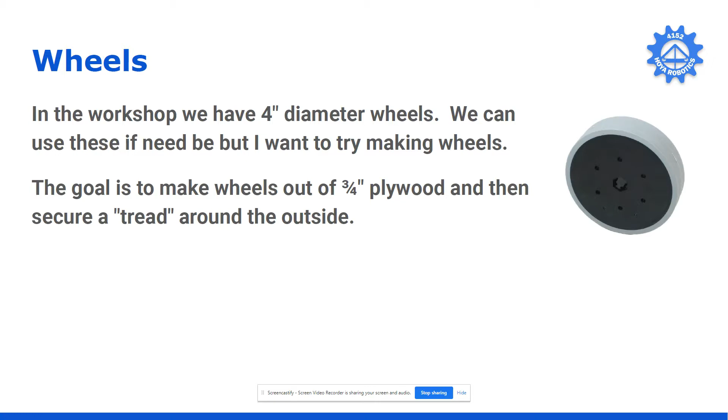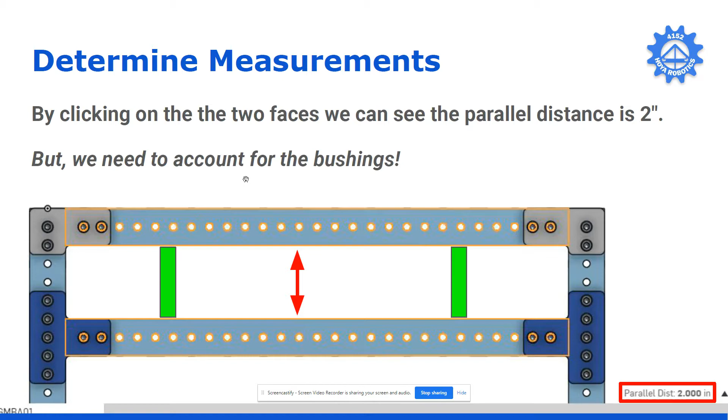So in onShape, it's really important: if you click on different parts, you can get distances between them. So I angled my view so that I could click on the inside of the square tubing and the inside of that, and I can see that the distance between them is 2 inches. And the key thing is that it's actually going to be a little bit less because I need to keep in mind the bushings. So when we have a shaft that spins, we need it to be able to spin smoothly. So you have a couple of options.

The option that we like to use the most are bearings, and this is an example of a bearing. You have little ball bearings inside of it and they spin. So this works really, really well. The problem is our 1-inch square tubing is just a little bit too small. So this year we were doing an intake that was going to be out of 1-inch square tubing because of the size we needed. So we tried using these types of bushings and they worked really well.

There's a little bit more friction than a bearing because it's solid brass, whereas the bearing has the wheels that allow it to spin. But it seemed to work really well, so we're going to try using that for our little mini robot.

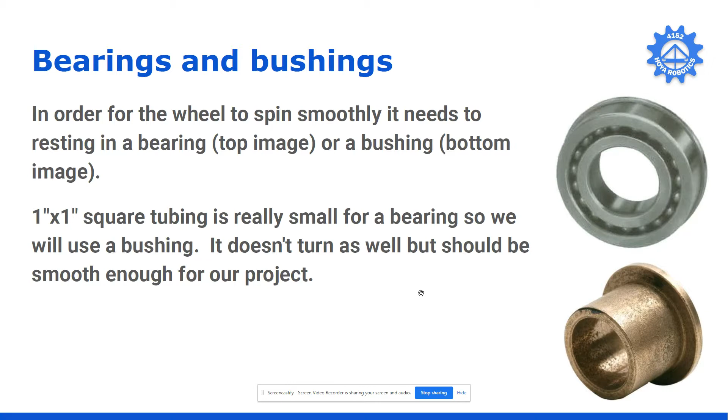Fastenal is a company that we like to get a lot of these supplies from, and so it's really important to go there, and I made note of what the part number is. But what's important is this flange; we need to make sure that we figure out the thickness. So the thickness of that is 0.063 inches. And that's going to stick out of the square tubing. So when we're making our shaft, we need to keep that in mind.

Now we tend to use Hex Shaft for shafts. The reason is that if you use a round shaft, you've got to figure out how to secure that wheel. And with the Hex Shaft, it works really well because the wheel slides onto it, and the hexagon shape means that when the shaft turns, the wheel will turn as well. So that's why we tend to use Hex Shaft as much as possible. So we're ready to get started. I'm going to switch over to onShape now, and we're going to get going.

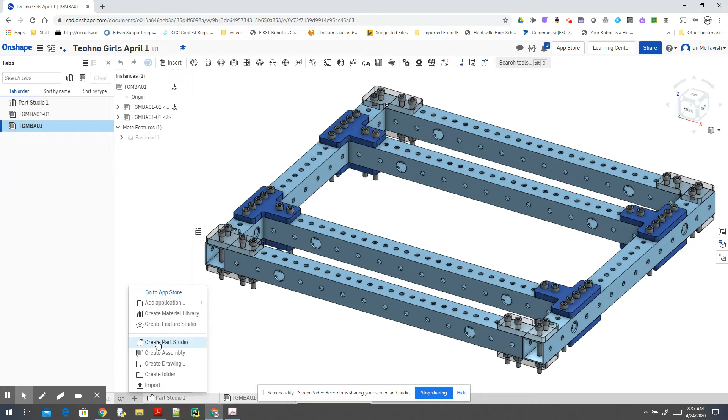So the first thing is that we're going to create a new part studio. We're going to click the plus sign, and we're going to click Create Part Studio. And we're going to rename it. So I'm going to rename this Part Studio Axle. You notice in the Tab Manager, I'm right-clicking and renaming. And if you don't see the Tab Manager, down at the bottom is the little magnifying glass, and that is how you can open up the Tab Manager. So this is going to be the axle that I'm going to be working on.

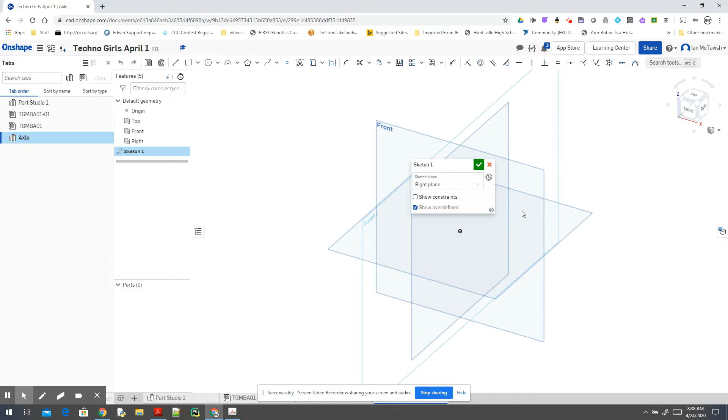And so I'm going to do that, and I'm going to select a plane. I don't want the top plane because then I have to turn my wheel up. So I'm going to use the right, because if I set everything up correctly, then it would be there. So clicking the right plane and then clicking sketch will bring me into the sketch. And just a reminder from an earlier tutorial, when you have this little sketch box up, you can see the toolbar. So if you're missing that, then you're not in the sketch. Clicking the green will save your sketch. Clicking the red is not good because it will delete it.

It will delete anything you've done since you started that particular time. So I'm going to press N on my keyboard. That normalizes my view so that I can easily see everything. And in Onshape, we've been doing rectangles and circles, but there's other tools. So we're going to use the polygon tool.

So the polygon tool is pretty neat. I can click on the center, and you can see I'm holding my mouse over the origin. It goes orange, and the little coincident icon pops up showing that when I click, this will lock the center in place to that. And I can move my mouse, so I'm going to click a second time.

Now, this second time, after I click, the little number 6 comes up. So if I move my mouse, this will change how many sides my shape has. So I want to make sure that I get it so that it's on 6 and then click a third time. So take your time with these things. It's really easy to make a mistake, so just go slow. If you run into problems, undo and try it again.

So I'm going to click the polygon tool to turn it off, and I should have a 6-sided hexagon on my screen. Now, there are constraints over here, and again, depending on your screen resolution, you might not see all of them in a line. You might see one of them with a little drop down. So you want to look for these two icons. If you don't see all of them, look for search tools, and then right beside it on the left with the drop down should be it.

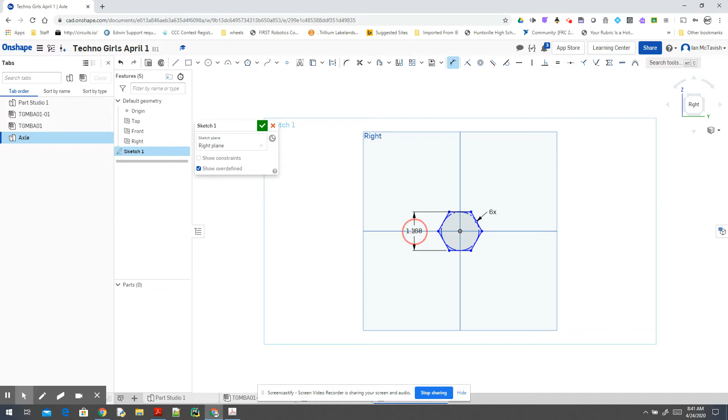So I'm going to click a third time, and now I can type in, and I'm going to type 0.5 IN for inches. So that will resize my polygon, and you'll notice my polygon is completely black now. That means it's fully constrained. It knows exactly where it's positioned. It knows that these lines are horizontal and that this is 0.5 inches away from the other line.

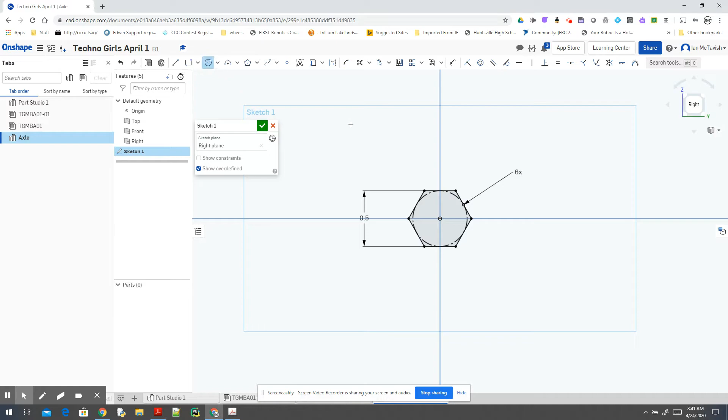The next thing that I'm going to do is I'm going to use my circle tool, and I'm going to click in the center, and again I'm looking for the orange to make sure that everything is locked in place. So I'm going to click once, I'm going to move my mouse, I'm going to click a second time, and I'm going to type 3/8. And 3/8 is the equivalent of, and notice I'm turning off my circle tool, 0.375 inches. So I have a 3/8 inch shaft, and I've got a 1/2 inch hexagon.

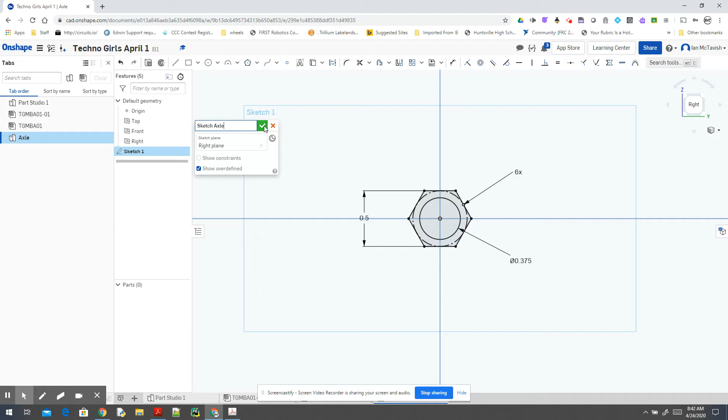So I'm just going to save my sketch. You'll notice that I'm naming it. Get in the practice of always naming your sketches so that it's easy to find them. So there we go, I've named it, and now I am going to click the extrude key. So with the extrude, I'm going to select the circle to begin with. And what I'm going to do is, first off, give it a name.

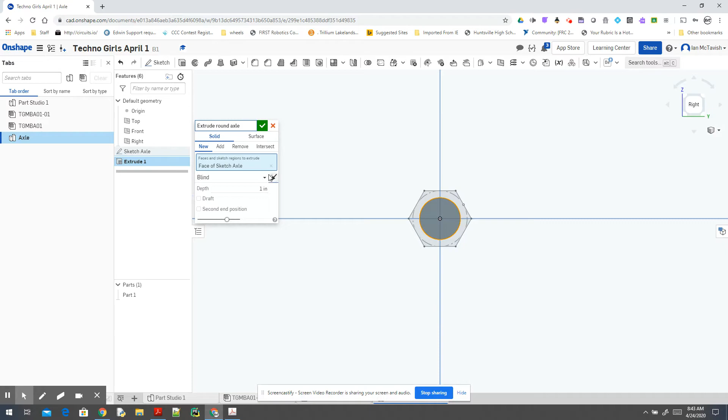So this is going to be the round part of the axle. And I've selected the round circle. And I am changing this blind. If I'm just going to move this, you can see that from the plane, blind means you're going in one direction. What I want is symmetrical. So symmetrical will mean my sketch is in the middle, and if this is 1 inch, then 1/2 inch is that direction and 1/2 inch is that direction.

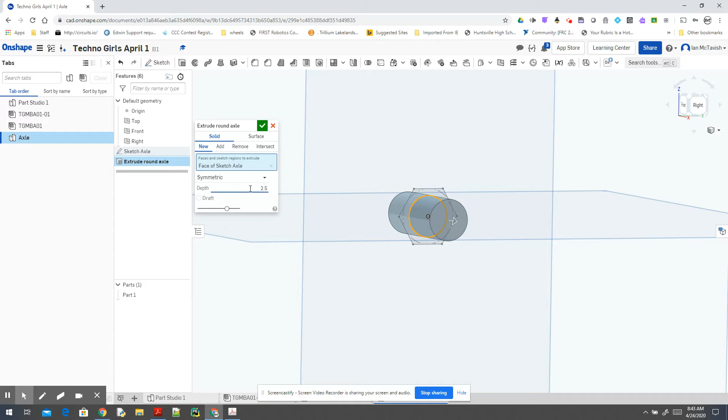So I'm going to type in 2.5 inches. 2 inches is the distance between my square tubing, and so my shaft will go 1/4 of an inch into the bushing on one side, 1/4 inch on the other. So that's the dimensions. So it's really important to select it, because it means we can use a few less steps for the next part. So right here you can see my sketch is hidden, so I'm going to click the eye so that I can see it, because I need this for stage 2.

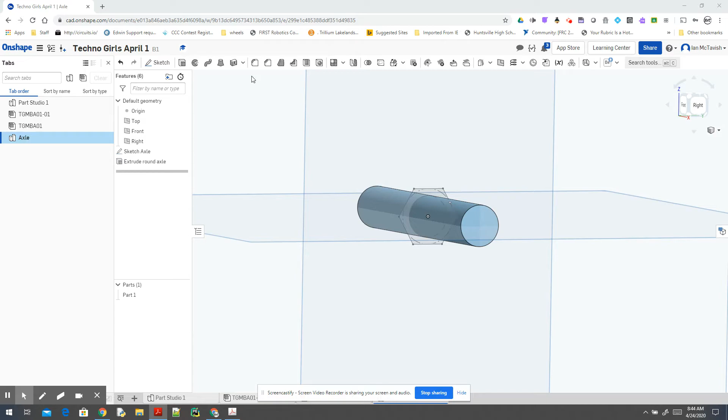So stage 2, I'm going to click extrude once again. This time I'm going to click the hexagon shape. And in the hexagon shape, it's adding, so that's perfect. And instead of blind, I want it symmetrical. Now, the depth is a little tricky. So 2 inches was the distance. So I'm going to do 2 subtract 0.063, if you remember, that was the thickness of the flange, times 2, because I'm going to have a flange on either side.

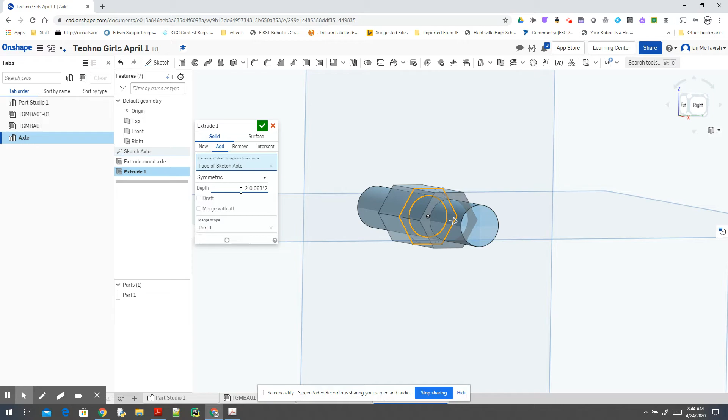So I can type in math and it will automatically calculate that distance. And I've got all the parts. I'm going to name it so that I know what part that particular extrusion is. So I now have a part that is hexagon and round at the end. Whenever you're designing parts, you always think, how are we going to make this? We are actually going to make these on the lathe. Basically we'll start with hex shaft and we'll run it on the lathe and carve out so that we've got the round part on either end.

So I'm going to name my part, and I'm going to go into properties, and my part is axle, and my part number, TG is the initials for TechnoGirls. So with our robot, we always use our team number, 4152. The next 2 initials are the name of that particular robot, so MB for MiniBot. In competition season, it's always the year that we use. And then this is a part, and it's part of the drivetrain, so 01, and I believe it's 04. 1, 2, 3. Yep, so that's my part.

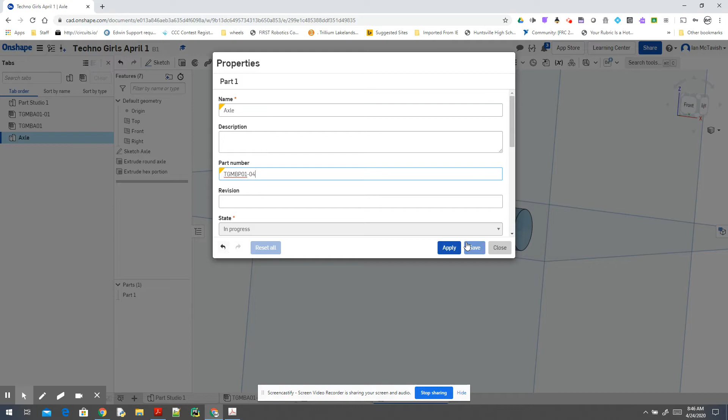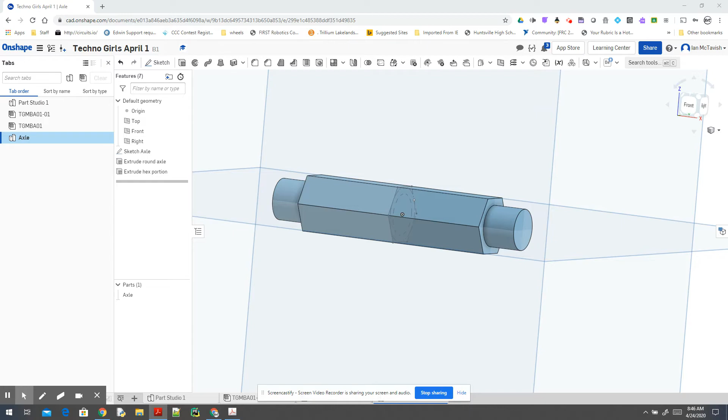And I can also assign a material, and it's aluminum. I'll need to double check. I believe it's aluminum 6061, but I'm not too concerned. It's mainly so that it generates the mass for it, but I need to check what it actually is. So that's the axle. That's great.

And now we're going to design our wheel. For the wheel, it's going to have a hex shape in the middle, and it's going to be 3 inches. The reason for that is the hex shape allows us to slide on, so that's great. We're going to use the CNC to cut it. And this is where we run into a bit of a problem. I'm going to just quickly jump through.

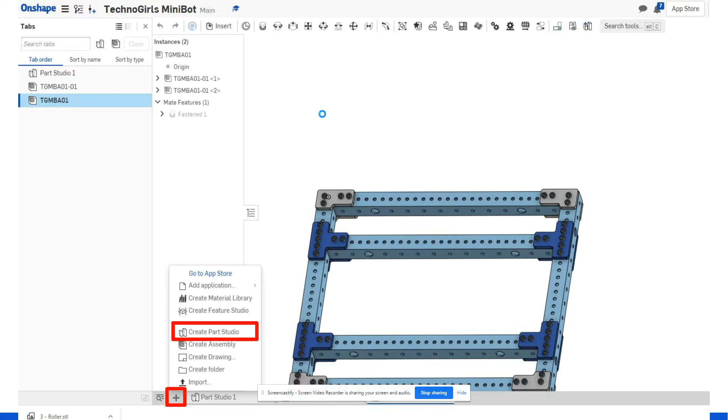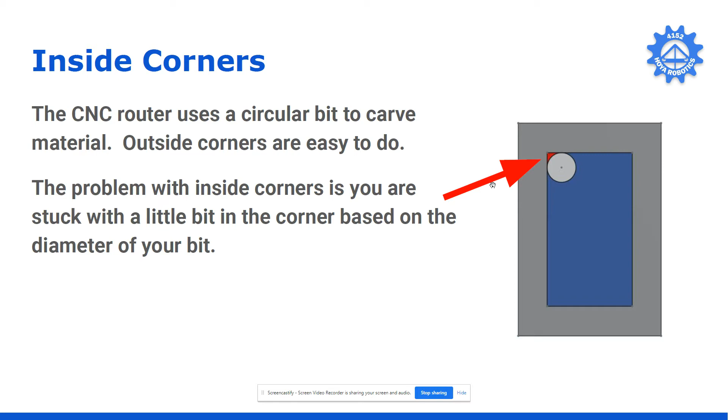And that's where the issue is, because now we try to put our piece through here and it's going to snag on that particular part. So that's the issue. There's a bunch of different solutions, and for this type of thing we're going to use the dogbone solution.

And the dogbone solution is basically we're going to add a circle in each corner, and the circle's the same size as the bit. So as the bit comes in, it can fit into the circle and fit out, and that way we can get the same shape. And our piece can fit on nicely because there's no material stuck in the corner preventing it from getting in, and it's easy to manufacture.

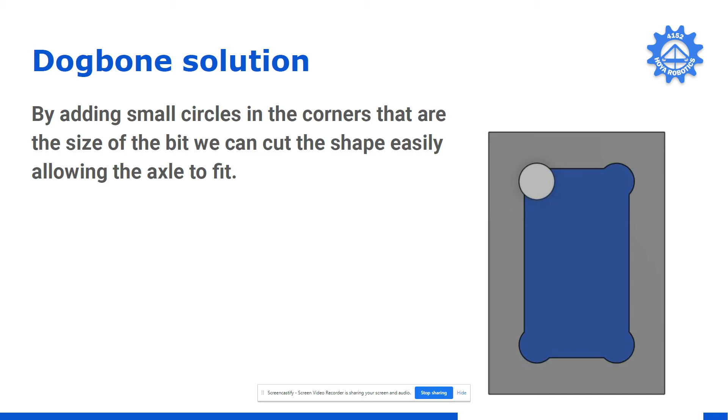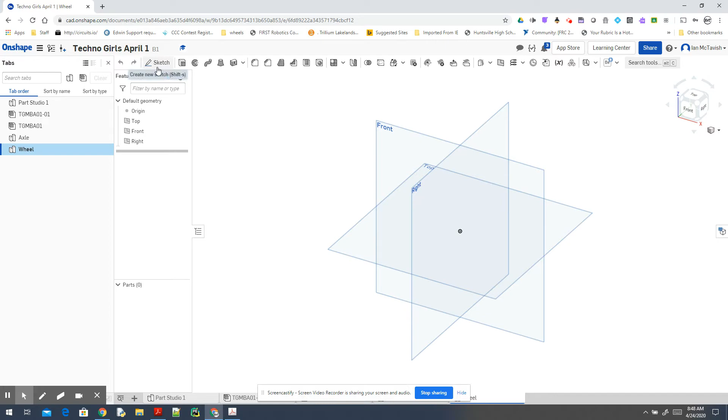So we always need to think about how we are going to build something, how we are going to manufacture it. So I'm going to be showing you how to do that. First things first, we need to create a new part. So I'm going to create a new part studio. Typically I would actually make it in the same part studio. And the reason I'm not doing it in the same is because I find when you're learning this, it gets a little complicated with all the different sketches and stuff. So I like to separate them when I'm learning, and then as I'm building stuff, anything that kind of fits together, I build in the same part studio.

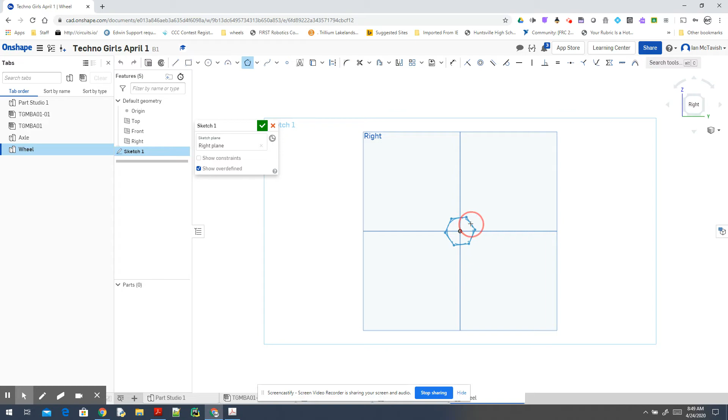So again, I'm going to use the right plane, and I'm going to click Sketch, and I'm going to press N, which allows me to normalize my sketch. And my polygon, very similar to what I just did. So polygon, I'm going to click, move, click again, click a third time to set the 6 sides. Always turn off your tool so you're not randomly making polygons. Set a horizontal constraint. There we go. And now I'm going to set my dimensions.

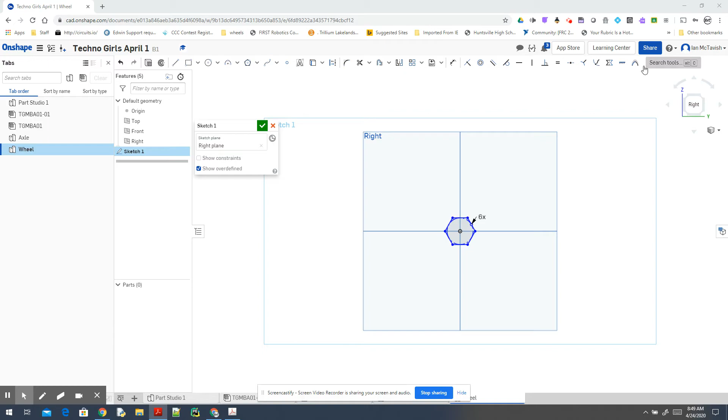Now, the difference is my dimensions are going to be slightly bigger. And the reason is, so I've clicked the dimension tool, click that line. So if I typed 0.5 inches, the problem is that when a hole and an object are the exact same size, the amount of friction, it's incredibly hard to get them on. So I'm going to make the hole just slightly bigger. So 0.51 inches seems to work really well.

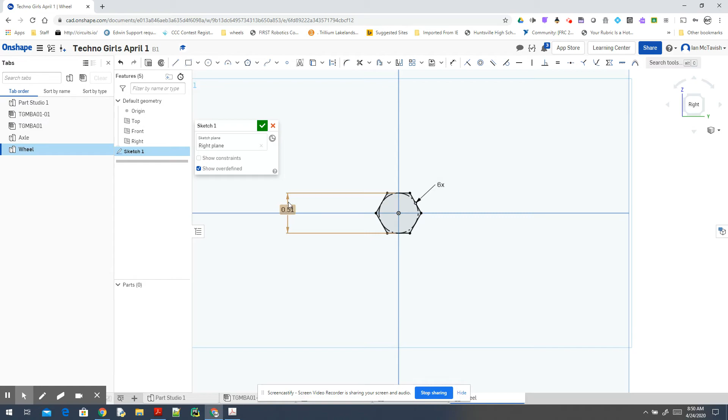So whenever I'm building something like this, I always add 0.01 inches to make it just big enough that things will slide on. Now you notice when I do holes for screws, I don't do that because we've already figured out the size that works well, so there's no reason to add to it when we've already got the size.

Now, there's a bunch of strategies that make this easy. I'm going to use the line tool and the construction tool, and I'm going to click on this corner and move my mouse to the following corner. And just hit escape because we don't need to set the height or the length. So again, line tool, construction tool, starting with this corner and clicking on that one.

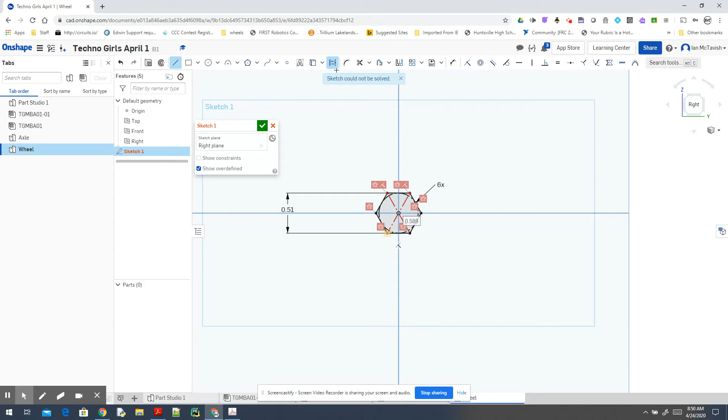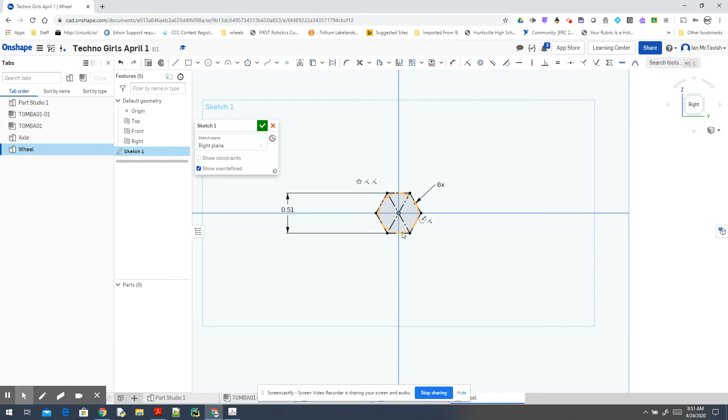Now, if you get all red, that's okay, just undo it. It's something to do with the geometry of this, so I just use the opposite one, and then it seems to work. So when you run into the red, always try to undo and fix it. And with this, all I care about is the diagonal, so I just start at the other point, and that seems to solve that problem. I don't need to worry about this line because I've already got the axes that I can use as a reference point.

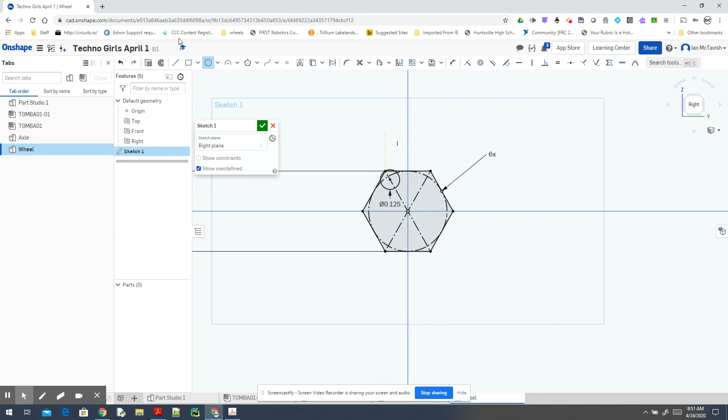So the reason I'm doing these diagonals is I am going to use them to lock my circle in. So here's my circle, so I'm going to hold my circle over the line. So this will force my circle to have the center stuck on that line, and I'm moving my circle. Do you see how that corner point is now highlighted in orange? So that is my circle, and I can set the size of that. 1/8. I'm going to use a 1/8 inch bit to carve this particular part out. So that's how I can do it.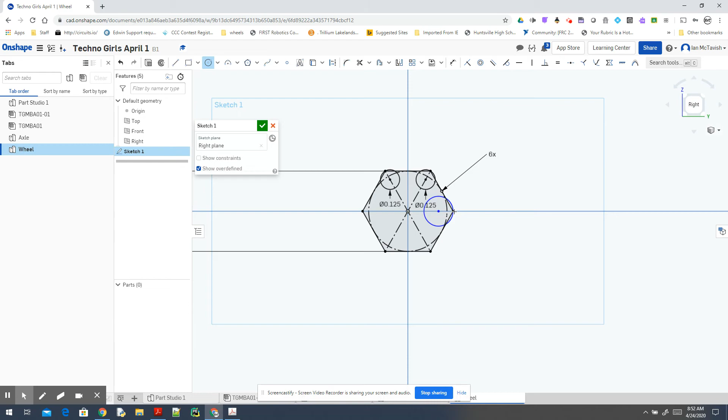So there's my circle. I need to do that for every corner, and this is where I'm doing it fairly fast. You're going to take a little bit longer if it's your first time doing this. Just take your time. And you'll notice with this one, I'm just making sure as long as that's orange, then my constraint is in there. So I'm just going around and clicking.

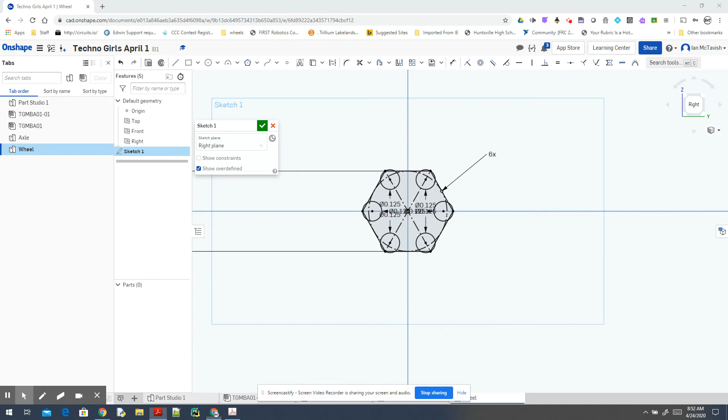And if you ever run into a situation where something got red, then just undo it, and you'll be able to fix it. Again, take your time. Okay, so there's my circles. So I've got a circle in every corner, and what I need to do now is I'm going to trim these circles. So I'm just going to zoom in so I can see what I'm doing.

And you can see there's a little scissors tool. This is your trim tool. So with the trim tool, if I hold my mouse there, you can see it highlights that little segment. So it breaks up the line based on this. Now, I'm just going to move this dimension over here because it looked like there was another line, and there really isn't. That dimension line is there.

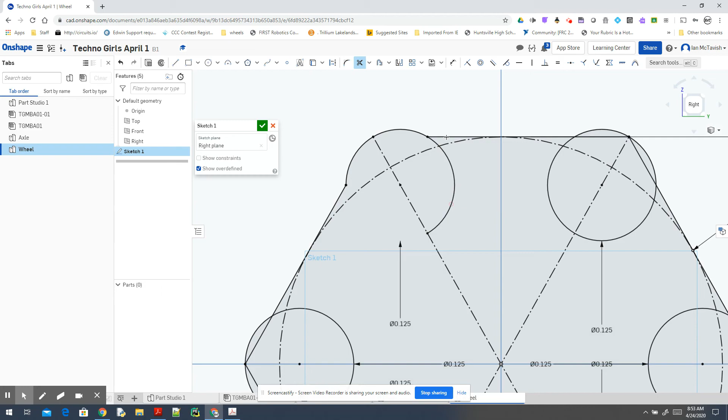So what I'm doing is I'm clicking that, and I'm clicking the parts of the circle that are inside, because what I want to do is I just want this curve right there. So I have set up this curve, and I'm doing the same thing here. And again, take your time, just one step at a time.

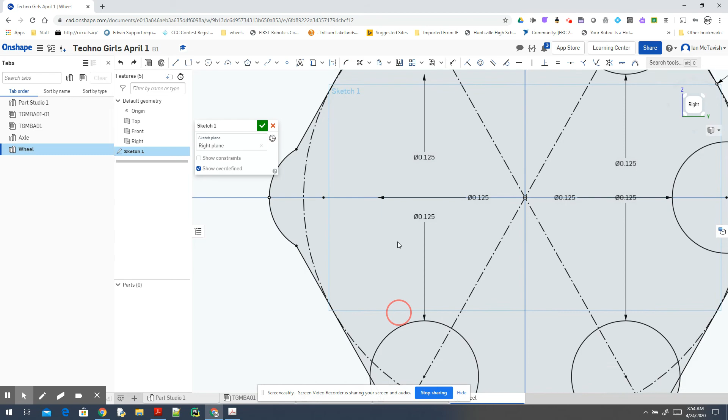You'll see that this is shaded. I'm just going to make a mistake, and all of a sudden it's no longer shaded because I accidentally deleted that line. So if you work slowly and undo when you make a mistake, you can get through this. Whoops, I've got to select my trim tool again. And there we go. Just going to quickly get these done.

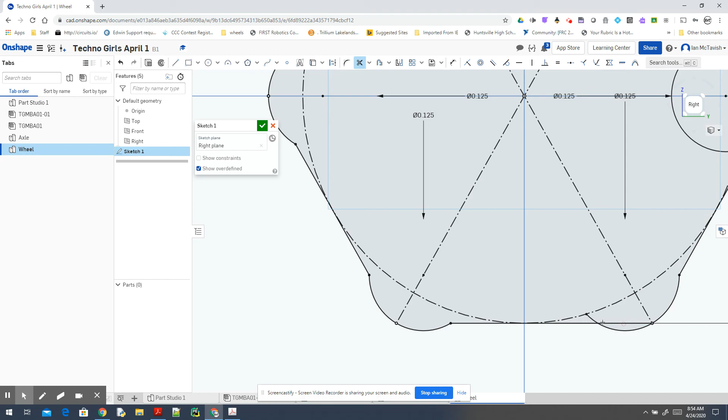So this will allow me to have the circle, and I don't need to click a whole bunch of stuff. I've made that mistake before where I haven't bothered to do this, and I had to click stuff, and it was really frustrating because I missed a tiny little piece in there, and so things weren't working. So I like to get this stuff done at this stage so I don't need to worry about it. And there we go. Not quite.

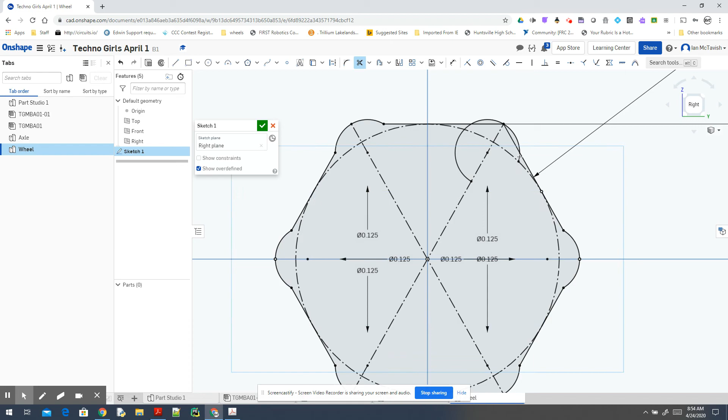So I have clicked this, so now I've got my hexagon with its little dog bone corners, and so that is excellent. And if I just zoom out a bit, you can see there is the hexagon. That's what it should look like. And I'm going to save that. Or no, I'm not done. Sorry. Now I'm going to add a circle.

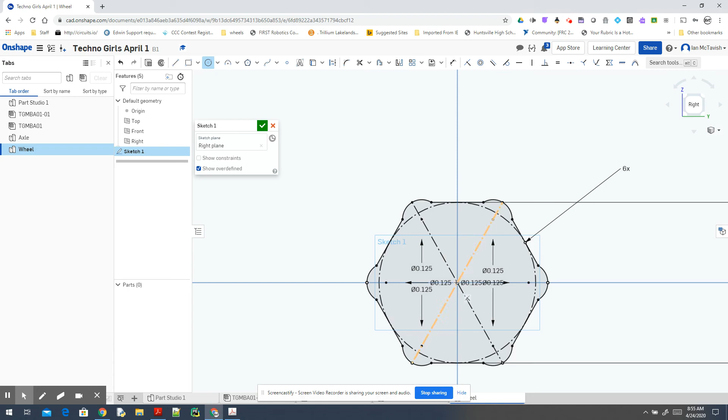So my circle is going to be centered. So I hold it so it's orange. Perfect. I'm just going to click out here and I'm going to type 3. Zoom out. So the diameter of my circle. Whoops. I'm just randomly clicking stuff. There's my 3. I just like to move it over so it's easier to see.

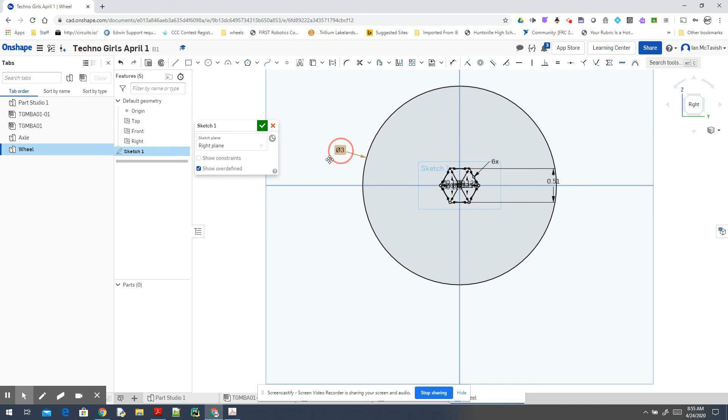So this gets a little bit busy in here. That's okay. So there's my circle. Everything's the way I want it. So this is my sketch wheel. I can save that. Now I can extrude my wheel.

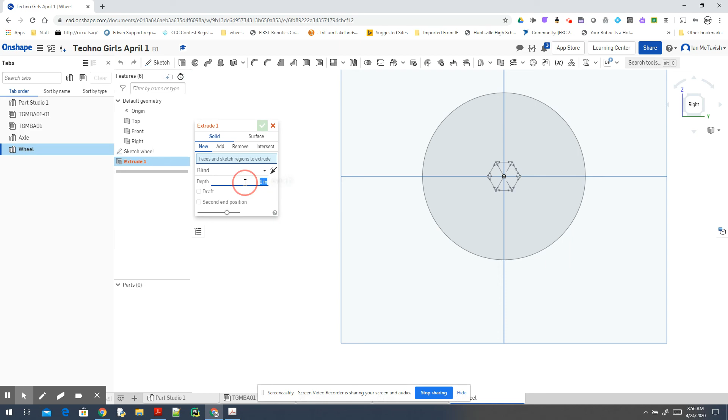And we're going to use 3/4 inch plywood, which is 0.75 inches. And we'll just click the wheel. You could also select the sketch and it would pick it, and extrude wheel. And there we go. There's my wheel, all nice and good. I'm going to right click the part and my properties. The name for this is wheel.

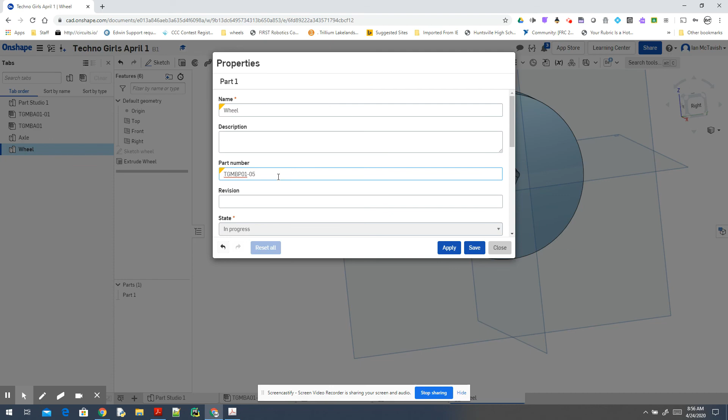My part number is TechnoGirls MiniBot part 01, so it's part of the drivetrain assembly, -05, it's the 5th item that I've made in the drivetrain assembly. And save. And if you forget your part numbers, don't stress. There's a later tutorial where we go over how to see all of them at once so that you can fix any mistakes. And assign material.

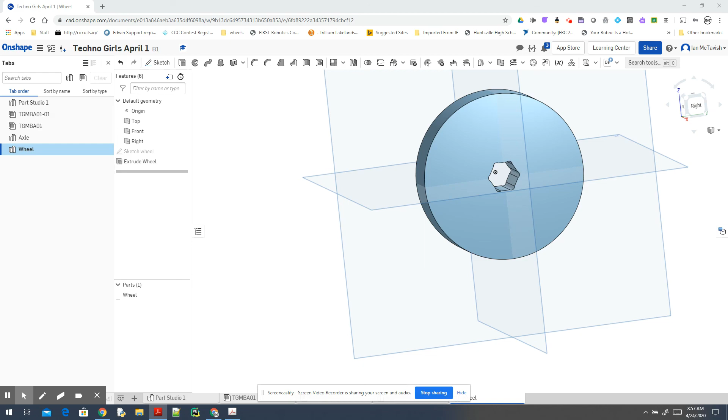I'm going to click, and we're going to use birch plywood, Baltic birch plywood, to make it. And that is our wheel. We would have added tread to it when we manufacture. I'm not going to add that to the drawing because it's just a little extra step that I really don't need. I've got my axle.